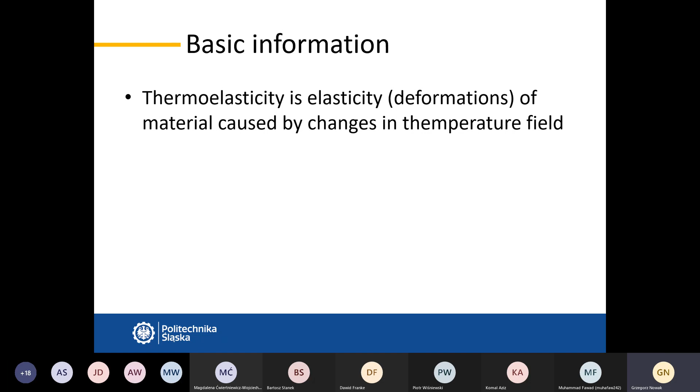In general, thermal stresses which are caused by temperature change arise in a system, in a component or object, when it undergoes a change in temperature. This is one thing which is required, which is crucial. And the other is that the component, system, or element is mechanically constrained.

So it cannot freely expand. Due to temperature change, it would like to extend, change dimensions, for example, but it is not possible, or it's only partially possible, or completely impossible because of constraints which are imposed on the body.

We'll discuss in a moment what the constraints can be and what is the reason for different stresses. So the topic will be covered during this lecture. I'm going to give you the information on the most common and basic cases, because if we go deep into the material, it starts to be quite complex.

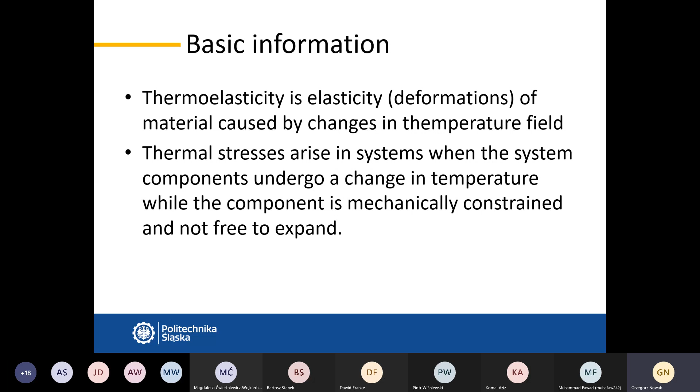Okay, so here we have two situations. One, a body, let's say a bar, can freely expand. So when we observe temperature change, it may be a temperature rise or temperature drop.

Doesn't matter, the object starts to expand. And if there are no constraints, no restraints against the deformation, and the body can freely expand, so there is nothing that constrains the deformation, the body will extend or will deform, and that's it. So nothing else will happen. Apart from the deformation observed, which can be measured, no stress will occur.

But on the other hand, when we have our object, the same object, supported somehow, let's say it is constrained due to walls. So we have a straight bar of a given length, and it is placed between walls, rigid walls.

Rigid means that they do not deform at all. Whatever the force is, they do not deform.

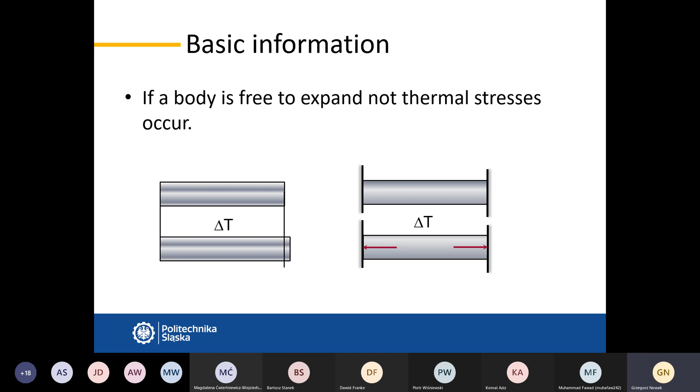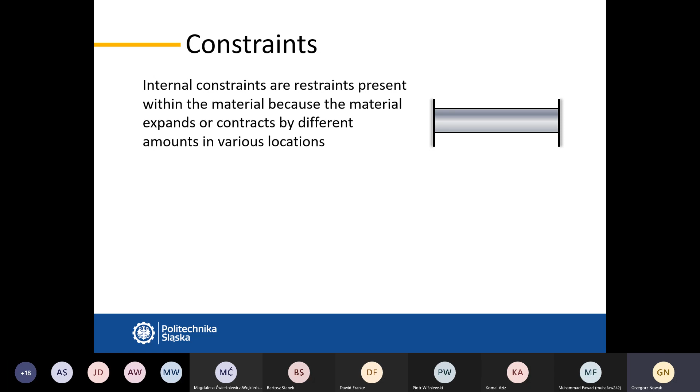And here we have the constraints, the two possible types of constraints which can occur in such a situation: internal constraints and external constraints. Internal constraints are restraints present within the material, inside the material, because the material expands or contracts by different amounts in various locations.

So you may imagine that with the temperature change, the material expands, or when cooled, the description is reversed. So let's say we have this situation.

We have a pipe with hot gas inside, and outside there is cold water. So look at what happens here: the pipe is hot here and cold here, so it tries to extend at the inner surface, but the cold water does not allow for extension of the external surface. So there is a conflict within the material between the areas which are hotter and areas that are colder.

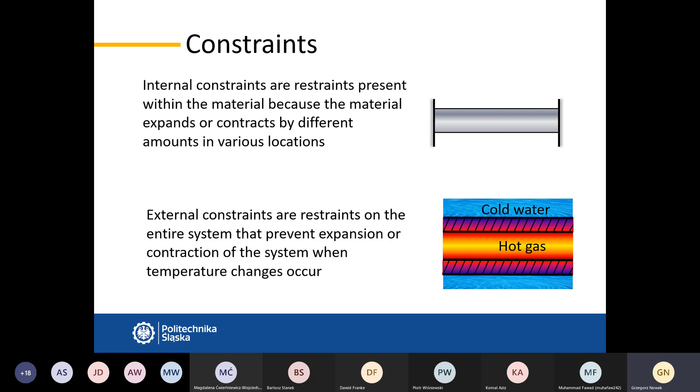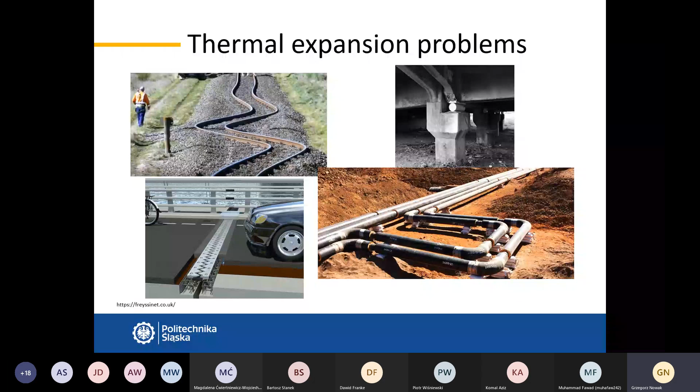Okay, we usually use different models to describe what happens in particular objects. As you may remember from your mechanics course or strength of materials courses, we usually use some models of objects which are bar or beam, so one-dimensional object, which are, let's say, pressure vessels, so shells usually, some discs. So most common objects encountered in practical applications, and they may be, of course, three-dimensional objects, which are quite difficult

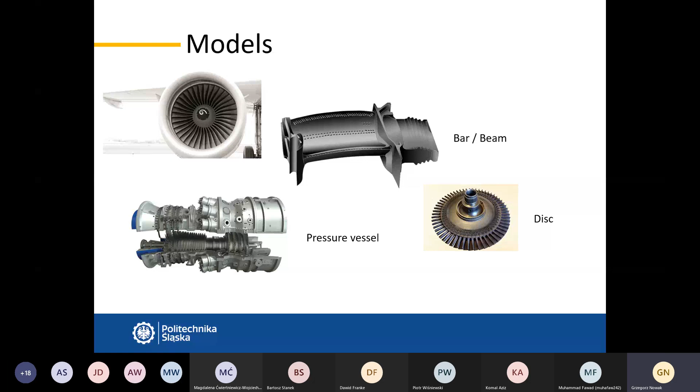to be analyzed by means of a sheet of paper and a pencil. So in such cases, you really do not have ready formulas for stress development, rather than use specialized software to determine stresses in such cases.

The determination of thermal stresses usually follows the thermal determination, or the determination of thermal field. So firstly, you need to determine the temperature distribution within the object, whether it's a steady state or a transient state. And on this basis, on the basis of temperature distribution, temperature field within the object, you can calculate thermal stresses. So these two phenomena are usually connected to each other.

So for many calculations, the first thing you need to do is to determine thermal field, and on this basis, with application of the appropriate material properties and application of constraints, you obtain deformations and stresses. So I'm just giving you a brief revision. I'm not going to cover the topic of heat transfer, but just brief information on what we need to provide for a usual computer system or the system you can write yourself, what we need to provide to get the temperature distribution, and then what to do to get the thermal stresses.

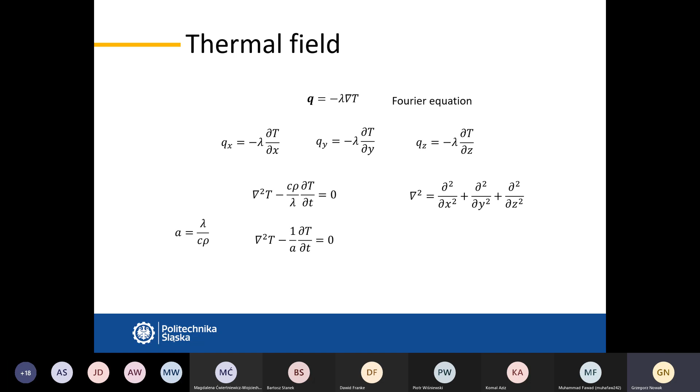We'll usually cover here the topic of steady states, or let's say a snapshot of unsteady states. So when the unsteady state happens, we can have a temperature distribution across a body. But we will not discuss the problem here. We will not solve problems of unsteady, so transient cases, because it's quite difficult to be solved on a sheet of paper apart from simple cases. These are the stories that are solved usually with a computer program, the software.

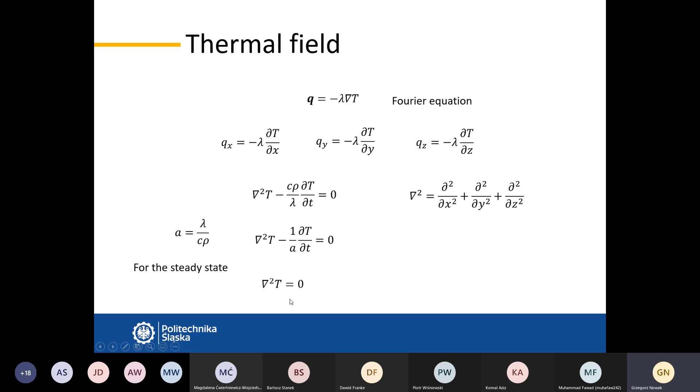If we have the steady state, the Laplacian of temperature is 0, so the second derivative over the space coordinates is 0. To solve the equation, this is of course the differential equation. We need some conditions so that we know something about the field.

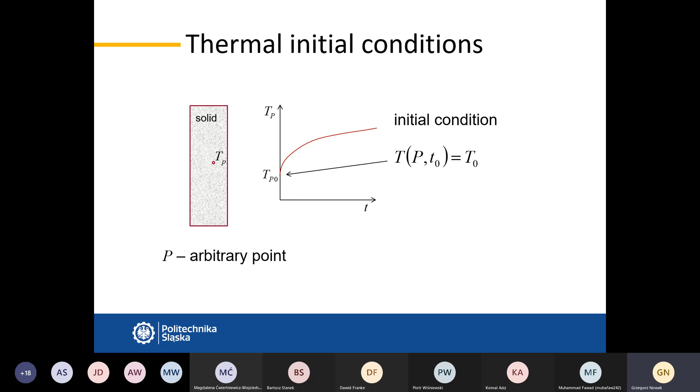If the problem is transient, so we have to foresee how an object will be heated up or cooled down, so how the temperature changes in time. We have to know what happens at some instant of time, let's say at the initial time of our computation. So we have to provide initial condition. So let's say a temperature distribution, for example, at t equals to 0. So at the beginning of our computations, or any other case, but usually the initial condition is the case where we know something about the thermal field, and then it evolves somehow on the basis of further conditions which are applied there. We can observe how the temperature field changes with time.

And we additionally need to provide thermal boundary conditions for the solution of the equation. So there are, as most of you know, 4 kinds of boundary conditions, 4 possible boundary conditions to be specified. All of them work well with the equation, of course. Not all of them are easy to be obtained for real situations, or sometimes not all of them are equally good applicable in the numerical software. Some are, let's say, more problematic than the others. But this is the problem of temperature field solution.

So the first boundary condition can be that we know how temperature changes at some specific points, line, surface, whatever. It can change in time, or it can be constant in time. So if we have transient conditions, it will change in time. If we have steady conditions, it will be constant during the entire time of our calculations. But one possibility is to provide temperature at some specific locations.

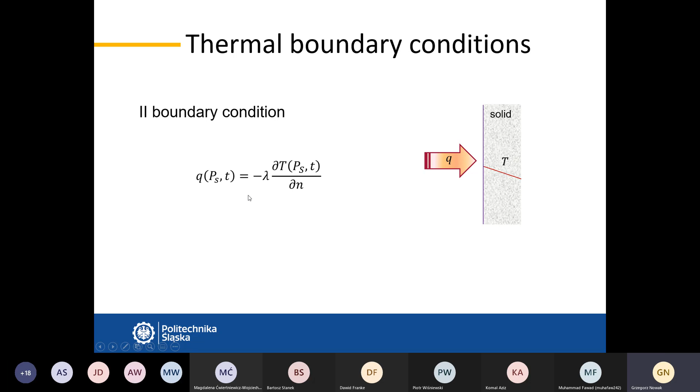And the fourth one is the contact condition, when we have bodies that are in contact. So we can equalize the heat flux that leaves one body, enters the second body. So we have temperature connection here on this. We can have a temperature connection there. They can be the same depending on the condition here on the boundary, but generally what leaves one body enters the second body. So these are the four boundary conditions, and there are four possibilities which are usually used to solve the heat conduction equation and to determine the temperature field.

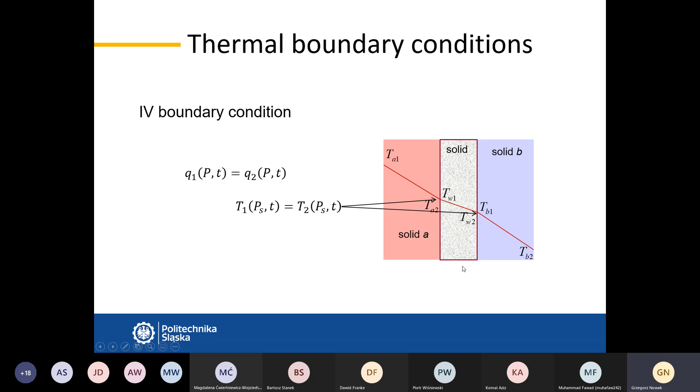And then we switch to a mechanical part. So we already have somehow determined the thermal field, and we try to get into the mechanical field now. So we'll discuss some issues on the mechanical problem. First, we'll start with the main properties that affect the material behavior under the changing temperature field.

So let's start with thermal expansion. This can be a revision since this topic should have been covered somewhere before in your education, in physics courses or strength of material courses. But to recall the information, we'll discuss it a little bit.

For example, if we have a bar, a rod, whatever it is, a body, at temperature T1, and it has length L, if we heat it up or cool it down, so generally we change the temperature, the body will expand.

We can discuss generally two thermal expansion coefficients, two possibilities or ways of discussing thermal expansion. One will be changes in linear direction, so linear changes in dimensions of the object, or the volumetric expansion.

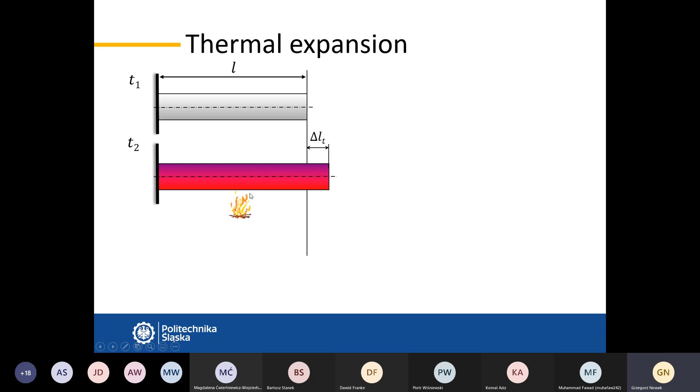Usually it is measured while thermal stress is 0. This is the usual case of determination or measurement of the linear thermal expansion coefficient. So you see dL over dt - increase in length due to increase in temperature, divided by the initial length of the object.

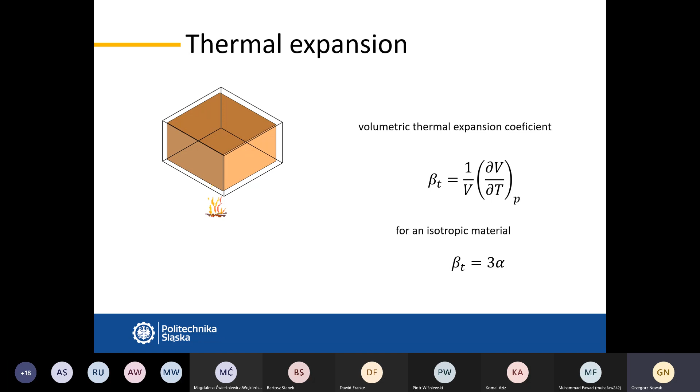If we discuss, let's say, a one-dimensional object, we treat only changes in stresses in one direction.

Let's look at some other quantities. If we have, let's say, a bar which has a length x0 and a width y0 in the lateral direction, and we apply force—so this is just a mechanical action—it changes its size due to the action of force, due to the deformations that occur in the material.

Of course, this is not observed when you discuss pure mechanics. If you recall your mechanics course, there was no deformation at all—we dealt there with a rigid body, a body that does not deform, which is, let's say, artificial. In a course of mechanics of materials, strength of materials, we assume that the material deforms, which is the case in real life, and the deformations, although quite small, are present.

So if we apply force to the bar, it changes its dimensions, and we can determine here strain, denoted with epsilon in the x direction, for example. So this elongation in this case is du over dx. Du means change in length, unitary change in length. So looking at the entire body, it is the change in length, this elongation, divided by the original length.

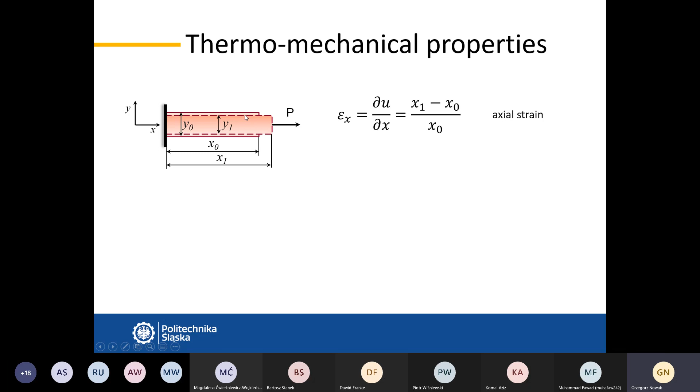And this is axial strain, meaning along the axis of the body. We see that it elongated, but we also see it contracted a little bit. So we observe lateral strain in the y direction, but also perpendicular to the screen in the z direction, and they are calculated in the same way: it's dv over dy.

u, v, and w are displacements—how far the material displaced, how far it moved. We observe that formally at the beginning, the height of the bar, let's say, was y0, and now after application of force it changed to y1—it diminished in this case. Similarly for the z direction, which is quite obvious. On this basis, we can determine a Poisson's ratio.

Poisson's ratio is the ratio of lateral and axial strain—along, let's say, perpendicular to the action of force, divided by the strain along the force. There is a minus sign because if epsilon x is positive, the body elongates, and the lateral strain is negative—it contracts. Opposite, if we compress the object, it would be shorter, so epsilon would be negative, and y and z would be positive because it would be thicker. So they are always opposite in sign.

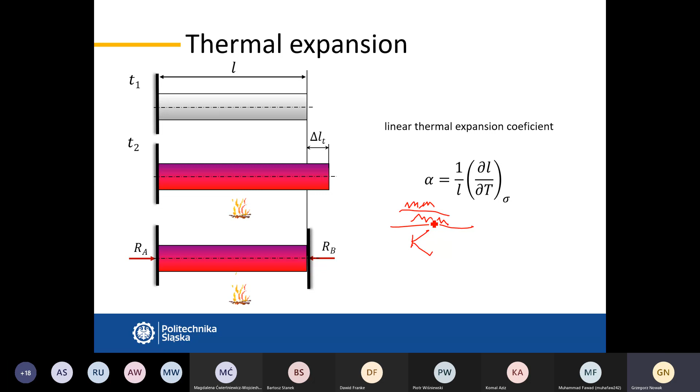This is strain, so change divided by the original quantity. So change in length divided by the original length. In general, the final result, if you cancel out the millimeters or meters, whatever it is, is 1 over Kelvin. But you have to have in mind that this is the strain resulted from a unit change in temperature.

Yield stress as well — there are some materials that do not exhibit yielding because these materials are brittle. So we have ductile materials that exhibit plastic deformation, and we have brittle materials that do not exhibit any plasticity, only elastic deformation and breakage, rupture. And we have a mixture, elastoplastic materials, which are not brittle, they are elastic to some region, and then they exhibit plastic deformation. So in this case, cast iron is the material that exhibits no yielding, no plastic deformation.

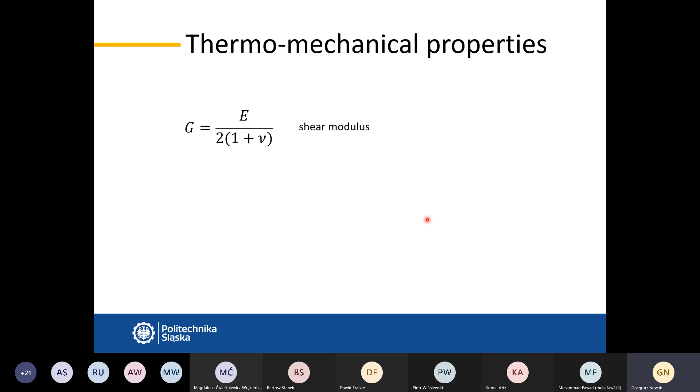We can also encounter another problem with thermal stresses, or with some thermal problems dealing with rapid changes in temperature. It can be determined on the basis of the so-called thermal shock parameter. And thermal shock, what is it? It occurs when a material is subjected to rapidly changing temperatures in the environment around it.

Let's say the situation can occur if a space vehicle re-enters into the atmosphere. We have a startup of a cold automobile engine, or a cold startup of a boiler or turbine. We have a quenching of metal parts. So there's many situations where the material undergoes very rapid changes of temperature.

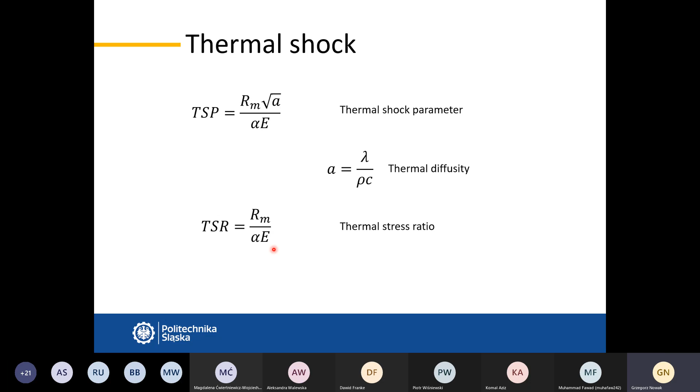This is expected. The thermal shock resistance shows us the magnitude of temperature difference, K, which if developed in the material would cause damage. We can more or less determine this for assessment of the material. But generally, the higher the stress, the higher the coefficients, the more resistant the material is.

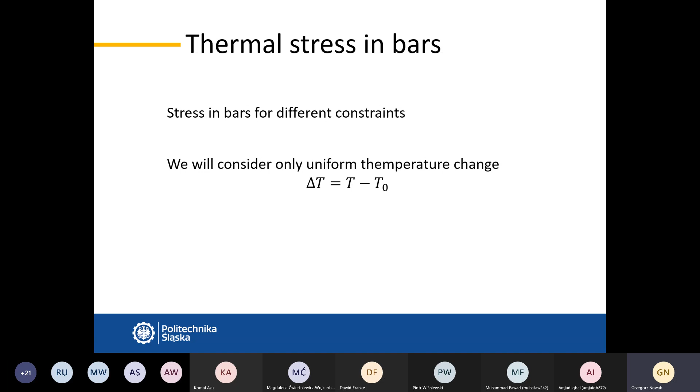We'll start with, let's say, the most stiff problem, the most rigid: a bar between two rigid walls, two rigid supports. We have already shown it - this is just showing that we increase the temperature, but generally everywhere we obtain the same temperature at the same instant of time.

Of course, it can be heated up or cooled down. We will not discuss the process of heating up or cooling down, just a given increase in temperature - let's say at the beginning it was 10 degrees and at the end it was 50. This is our interest; we do not discuss how the process ran, we just have the initial and final stage.

If we do a section - this is the usual way of solving such problems - we try to see what is the stress inside, what is the internal force, and in consequence what is the stress. We can build an equation of equilibrium for the cutoff part of the object. From here, from the entire object, we can say that RA equals RB, but we have no idea how much it is.

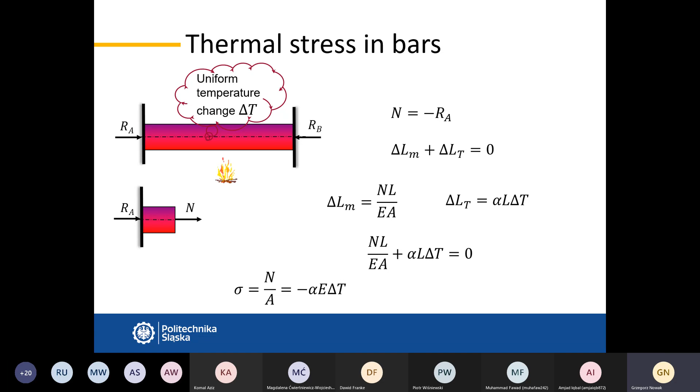So we have the first part, let's say the most rigid case, where there is completely no possibility of any deformation - a fully constrained object.

Now let's look at something different. Let's allow some deformation - not fully, so it is not completely free, but let's assume there is a gap. This is what we discussed before and showed on the bridge. So one of the methods to relax the external constraints is the gap.

So it's not fixed, but there is a small possibility to extend. Whether the object is heated or cooled, it has some possibility to change in length, which is governed by the equation we already know. If the increase in temperature is such that this elongation will be lower than the gap between the contacting object or support, so the elongation will not reach the boundary and will not touch the support, the stress will be zero. So the object can freely extend.

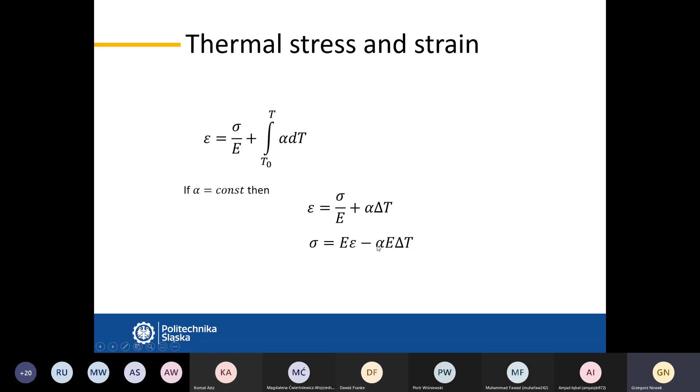So you see that the stress now will be slightly different. We have an opposite sign of sigma for the mechanical and thermal parts.

So you see that the stress will generally be smaller because we have 1 minus something. If this something is non-zero, so delta is non-zero, the stress will be lower than in the case of completely constrained deformation.

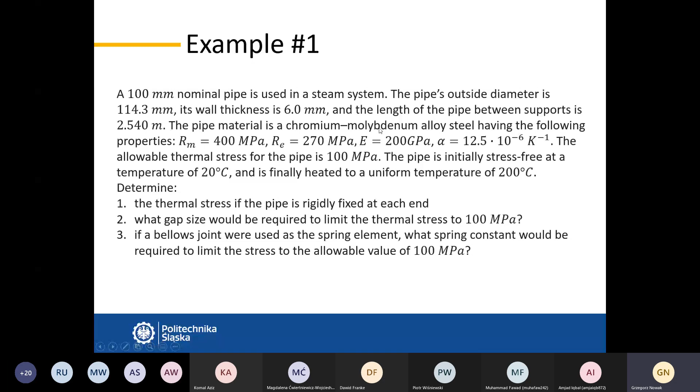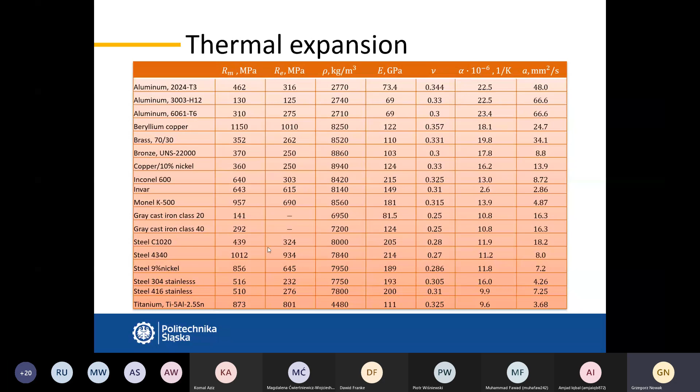Okay, we can see this is a chromium molybdenum alloy steel. If we go to our table, do we have something like this? It's somewhere here. Or this one, it's somewhere here. So the ultimate stress is something around this value. So we can expect that the material for sure is within the plastic range, above yield stress, or even reaching the ultimate stress level.

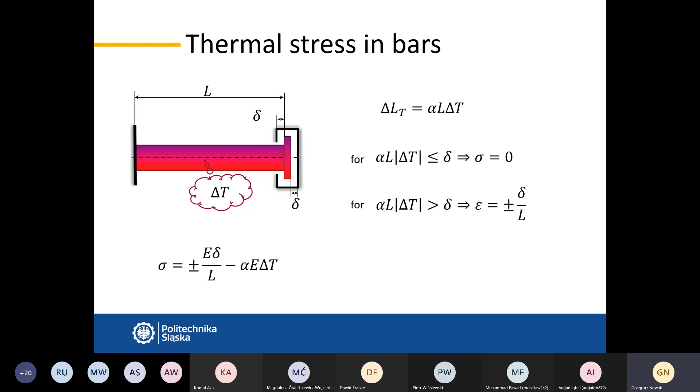So this is a destructive temperature rise for this material, and this is, as we see, only 180 degrees Celsius temperature rise. Okay, but the ends are fixed, so no movements are possible.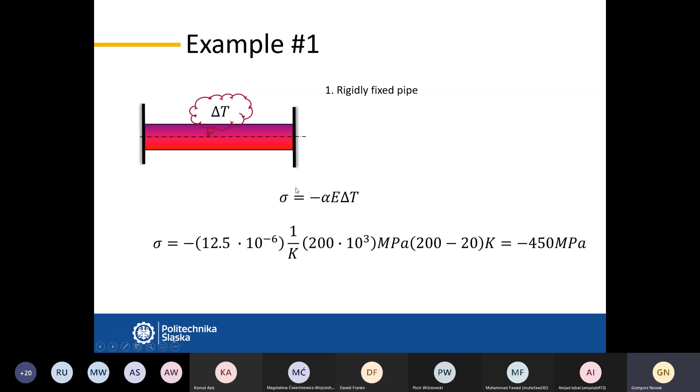So let's look at what we can do with the problem to reduce the stresses a little bit. Assume we have a support with a gap. So there is a gap delta before it gets into contact with the support.

So we know that the stress is governed by such a formula, which we already developed, and the gap is here. Other parameters we know: the maximum allowable stress, alpha, E, delta T, and L. So everything is given.

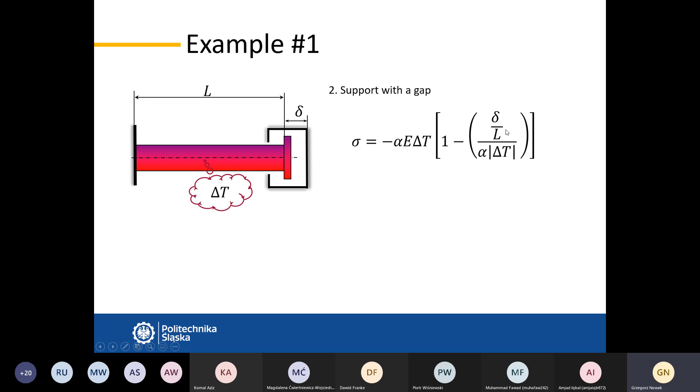So this data is introduced, and we can calculate delta from such a formula. If we solve it for delta, we can calculate the gap here, which is 4.45 millimeters. This means that if the gap between our bar and the wall is 4.45 mm, the stress developed will not exceed 100 megapascal.

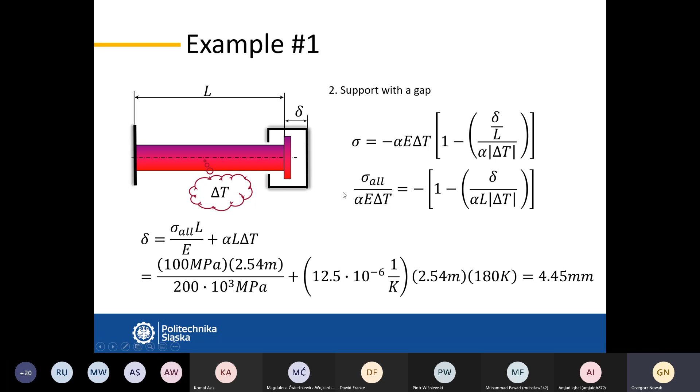Because we limited this to 100 megapascal, the allowable value given here, we can also check the pipe against buckling, because if it leans against the wall, it is compressed. As you may remember from the strength of materials course, a slender object, so a long and thin object exposed to compressive loads, is threatened with a buckling process, a sudden loss of stability.

So it can buckle, it can rapidly bend if a compressive force is bigger than the so-called critical force. Recall the basics of strength of materials. For this reason, we will need the cross-sectional area of the pipe, which is pi times D minus G, where G is the thickness of the wall, times G, and it will be 2041 square millimeters. So this is the cross-sectional area of the pipe in question.

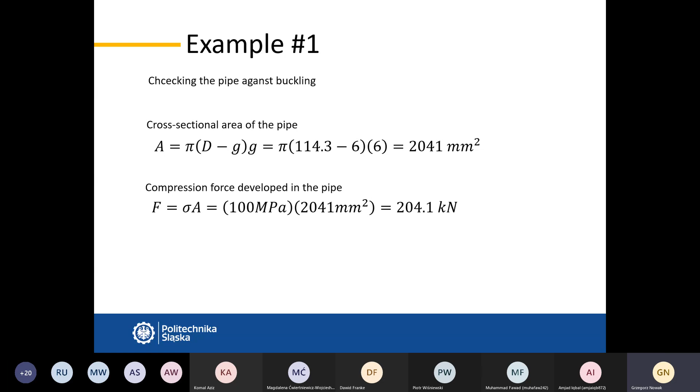Okay, to check the pipe against buckling, we need some more things. This is the moment of inertia, which for a pipe is pi over 64 times the external diameter to the fourth power, minus d minus 2g to the fourth power. So external pipe minus internal pipe. This is the moment of inertia, and the Euler critical force is two pi squared times E times I, divided by the buckling length squared.

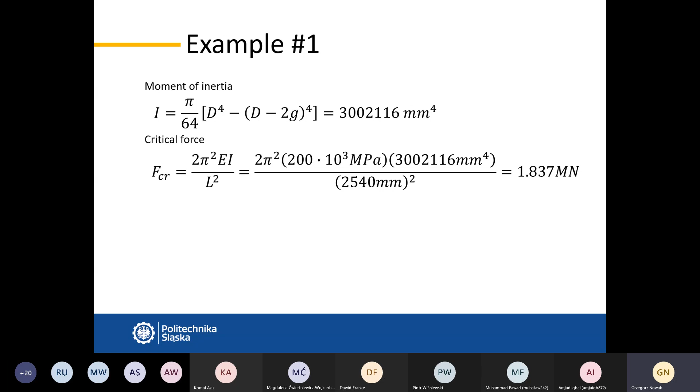And it is, as we put there, 1.837 meganewtons. So this is the force that would cause buckling, the critical force. Our force is 0.2 meganewtons, which was 204 kilonewtons, so 0.2 meganewtons. We see that the force is like 9 times lower than the critical value, so there is no threat of buckling. So we can sleep calmly, no problem with buckling in this case.

So this is the thing. This was the possibility to reduce stresses if the gap is introduced, 4.45 millimeters. So that was one solution to the problem of excessive stress.

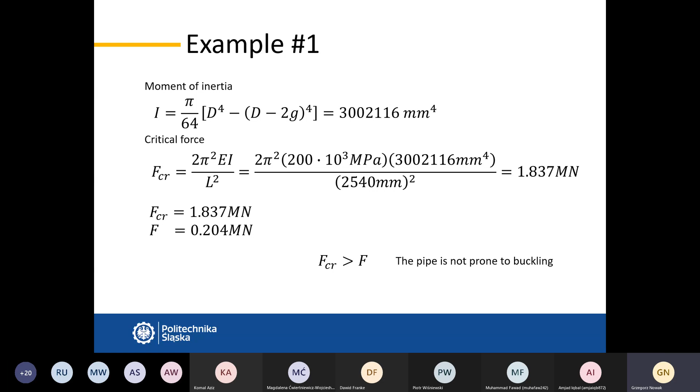We can check what size would be required to have no stresses in the bar, which means how far the object extends. This is the amount, of course: delta equals alpha L delta T. It would be 5.72 millimeters. So if the gap was that much, the pipe would not come in contact with the support, so there would be no stress at all.

To have stresses not bigger than 100 megapascal, it's enough as the gap is 4.45 millimeters. So you can control the amount of stresses developed in the system by applying an appropriate gap between the object that is extended, under the change temperature condition, and the support.

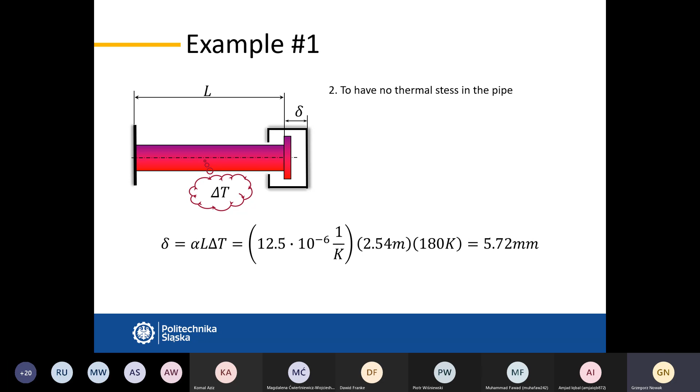There was a second possibility to be discussed. There was such a question: what elastic support should be applied there? So what should be the spring constant, in other words elasticity of the support, to have also stresses not bigger than 100 megapascal. This is the case we have to discuss now.

So we use the formula also developed there: minus alpha E delta T, and the factor which is responsible for relaxing the stresses, this part, EA K spring L. All of these data are determined. We have to solve it for K spring, to determine how big the K spring should be to have the stresses not bigger than 100 megapascal.

If we divide it by alpha E delta T, on the left hand side we have sigma divided by alpha E delta T, and that is minus 0.222. On the right hand side we have 1 over 1 plus EA K spring L.

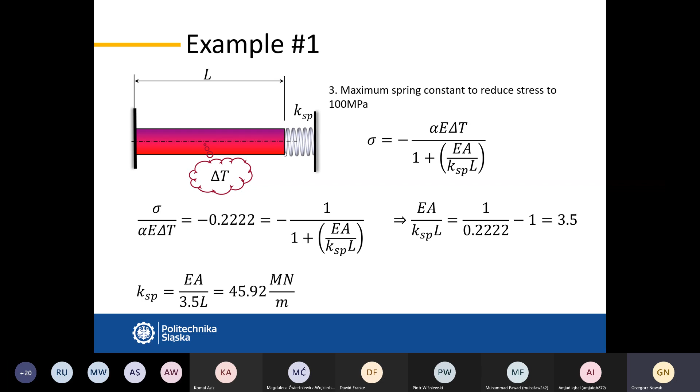So calculating K spring, or at first this factor which is in the bracket, it should be 3.5. So the K spring should be 45.9 mega newtons per meter, which means that 45.9 mega newton force would provide a meter change in length.

Of course, this is expressed in the basic SI units. If you divide it by 1000, here would be kilonewton, here would be millimeter. So 45 kilonewtons of force would be required to compress the spring by 1 millimeter. This is the meaning of the K spring. So this is 45 meganewtons per meter, and this is a fairly stiff spring.

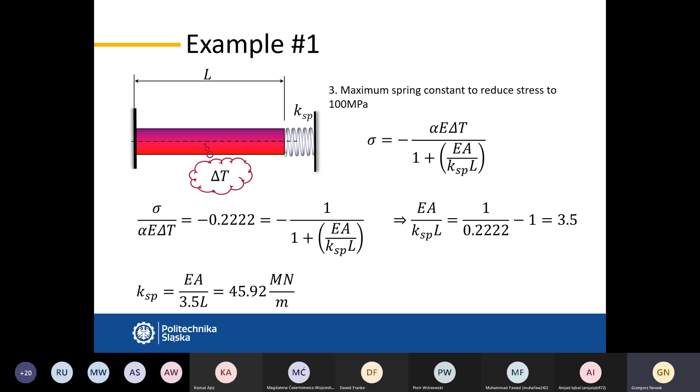Okay, now we'll go a little bit deeper. We will look at problems where we have components co-working together. Let's say we have bars in parallel. There are two objects, which is very often the case encountered. Different structures are built in such a way that we have elements that are connected together.

We will discuss here such a problem that we have bars in parallel. They are of different lengths, just schematically shown one next to another. The configuration can be different, but in general they work together. The first one is of length L1, the other is of length L2. The left ends are fixed, and the right ends are joined together with such a rigid plate.

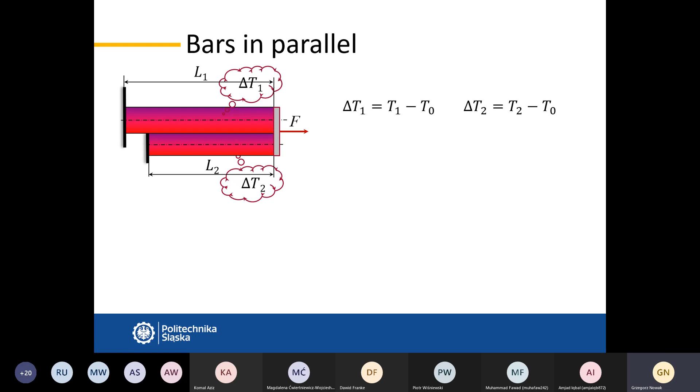So depending on the magnitude of delta T, in general it will always be the same story: one will have positive stresses, the other will have negative stresses. One will be extended by the other, and the other will be compressed by its neighbor. And this is the result.

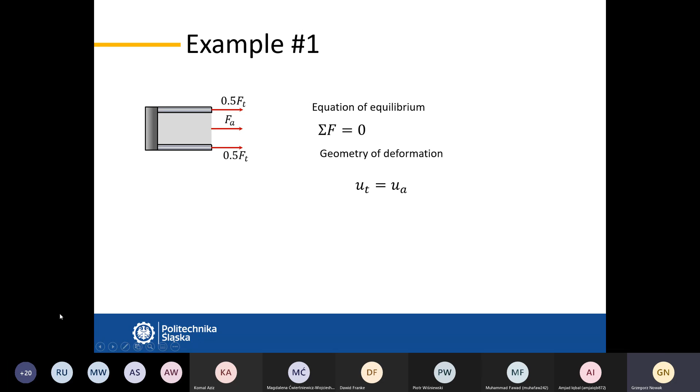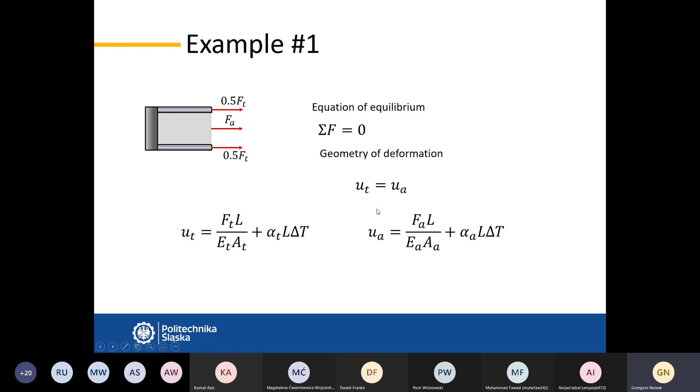We know that elongation is provided by force, and also by temperature change—this is what we've been discussing all along. So force in titanium provides elongation: force times length divided by E times A for titanium, which is the mechanical elongation, plus the thermal elongation, alpha L delta T. Same for aluminum, the core: force developed inside times L over E times A, plus thermal deformation. Both elongations are the same, so we can compare them together.

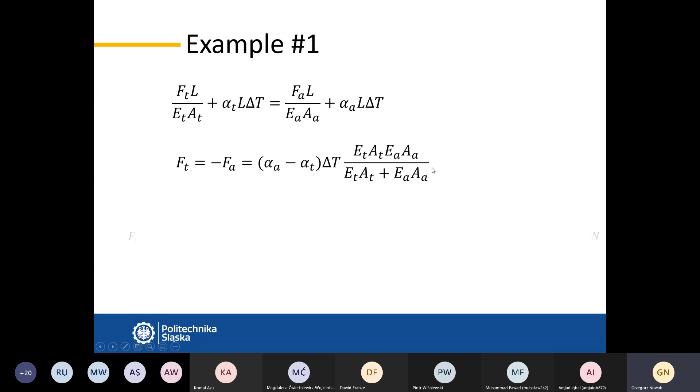So they are put into an equation, and we can determine the force. From the equilibrium equation, Ft equals minus Fa, so we can substitute one for the other, and calculate the force using the difference of coefficients of thermal expansion, the common increase in temperature, and the cross-sectional areas and Young's moduli as factors. All the data are known—expansion coefficients, how much it was heated up, and all material and cross-sectional parameters—so if we put the data in, we'll get the result.

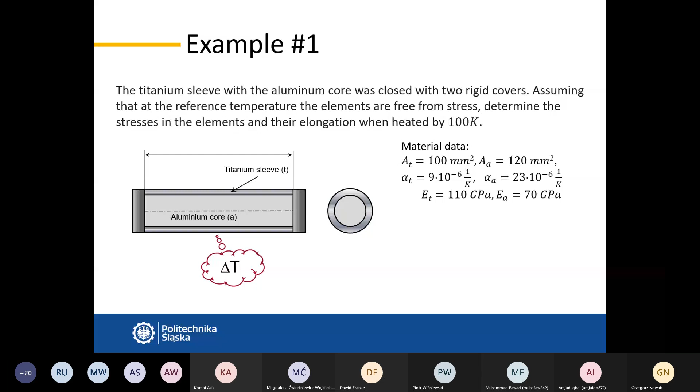The force developed inside both the aluminum core and the titanium sleeve is the same, equal to 6.66 kilonewtons. As you may expect, the sleeve will be extended and the aluminum will be compressed. If the core extends more, it will be constrained by the titanium sleeve. So the titanium sleeve will provide a compressive force on the aluminum, while the aluminum will provide a tensile force on the titanium, and vice versa—one is compressed, the other extended.

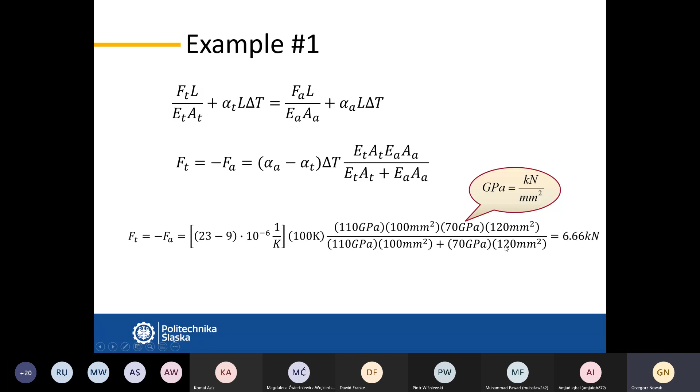We know the magnitude of the force is 6.66 kilonewtons. We were asked to determine the stresses. Stress in titanium is the force divided by the cross-sectional area of the sleeve, which is 66 megapascals. In aluminum, it is minus 55 megapascals. So the stresses in both components will always be opposite—if one is in tension, the other will be in compression, because they interact with each other.

They deform at different rates, but the total elongation is the same—UT or UA, both deform the same. If we put the data into the formula, we get 1.44 millimeters observed as the deformation of the entire system while heated up by 100 Kelvin. But when more than one material is involved, it results in mutual interaction between them—we can say this is an internal constraint, because everything happens inside the co-working, co-making components.

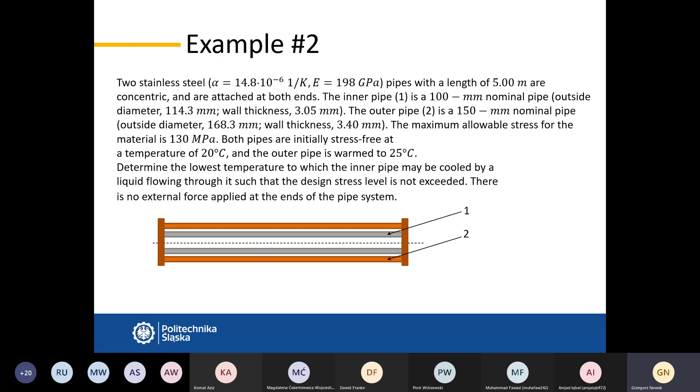So we have exactly the situation which was discussed before. We have two pipes in parallel, so we can use the formulas which were developed there. So we need to look at the formulas. We have stresses here, so we need delta T's, one of them will be calculated. We know stresses which can be developed. There is no force, so this factor is 0. And we have such products EAL.

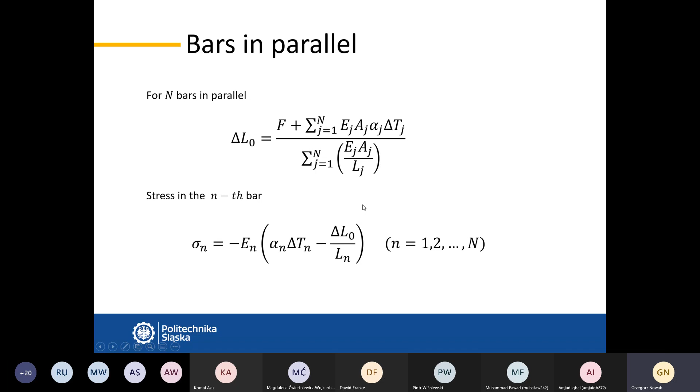So we need the cross-sectional area. Cross-sectional area of the first pipe is 1066 millimeters squared, and the second pipe is 1761 millimeters squared. And this ratio E1 A1 L2 divided by E2 A2 L1, it is in the factor. Since the pipes are made of the same material and the same length, E1 and E2 is the same, L2 and L1 is the same, so it cancels out, and there remains only the ratio of the cross-sectional areas, which is 0.6052.

What else do we need? We have temperature differences. Delta T1 is T1 minus T0, and we know that. Delta T2 is T2 minus T0. T0 is known in both cases. T1 is known. No, T2 is known - what happens with the external pipe, it's heated by 5 degrees. But if we expand it, we'll get T1 minus T2 from this difference of temperature changes for both pipes. So it is T1 minus T2, so the final temperature of pipe number 1 and final temperature of pipe number 2.

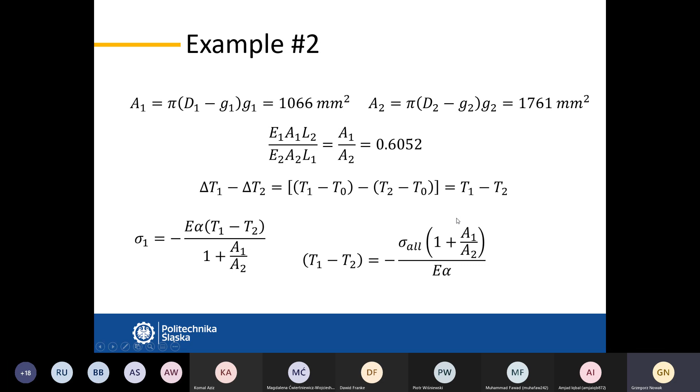So the temperature difference between these two pipes, if we put the data in, can be 71.2. So the lowest temperature of pipe number 1, the pipe that is inside, is 25 minus 71.2, so it's minus 46.2 Celsius.

And in such a case, sigma 2 will be 78.7. So what we gained is that if the temperature of the external pipe has risen by 5 degrees Celsius, so it's 25 now, the internal pipe temperature may be as low as minus 46.2 degrees Celsius. In such conditions, in pipe number 1, the internal pipe, stress will be 130 megapascal. But on the other hand, in the external pipe, stress will be positive and it will be 78.7 - a little bit more than half of the stress obtained in the internal pipe.

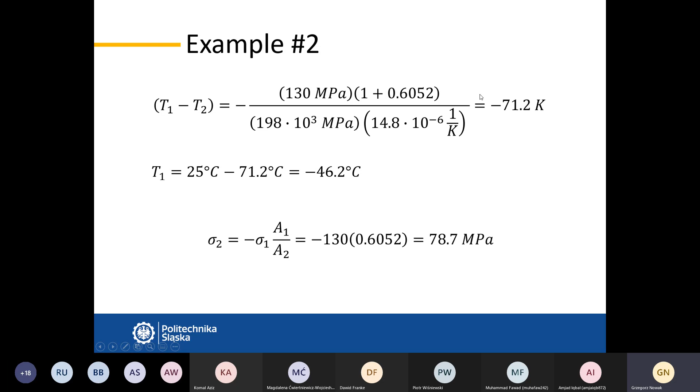Okay, and some remaining parts. I think we will be able to finish this topic today. I don't know, we'll see.

So the same situation can occur, similar to what it was for a single member. We can have the same situation in case of two members connected together, but not rigidly, not with a rigid plate, but providing them slight independence. So we can again apply there an expansion gap.

So they are not fixed together, but there is a slight possibility of slight difference in elongation. So before they get into contact, there is, let's say, some buffer available.

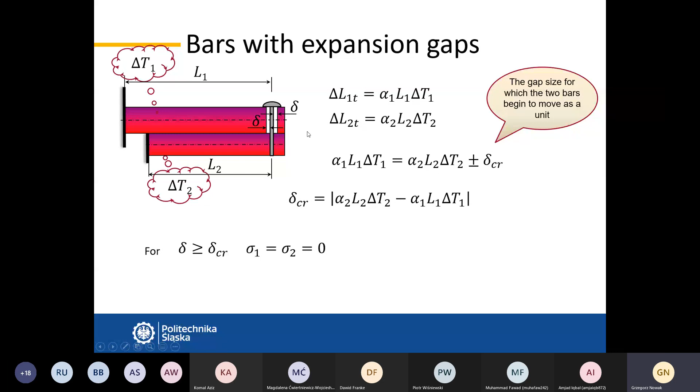And let's now consider the case in which there is no external load applied. So we have only mutual interaction between these two members. So net force, external net force is 0. There is nothing else acting from outside. So only if one member extends more, it drags the other member. So they interact between each other, with action-reaction. No external force applied, so the sum of these two forces generated must be 0.

So if no external force is applied and it's 0, we have that if the lower member extends more, it will drag the other member, so it will provide an opposite force in the other.

So the equation for equilibrium is F1 plus F2 equals 0. These are the factors from the previous slide, that's why we found these forces sigma 1 A1. This is the force in member number 1, and this is the force in member number 2. Sigma times A is just a force.

So if we put the data in, the sigma times A from the previous slide gets bigger and bigger. The formulas are starting to be terrifying, but in general there are only material properties, lengths, and rises in temperature. Here is the delta observed, which is the thermal gap between these members. So the total elongation of the entire system, when it gets into contact and they move together,

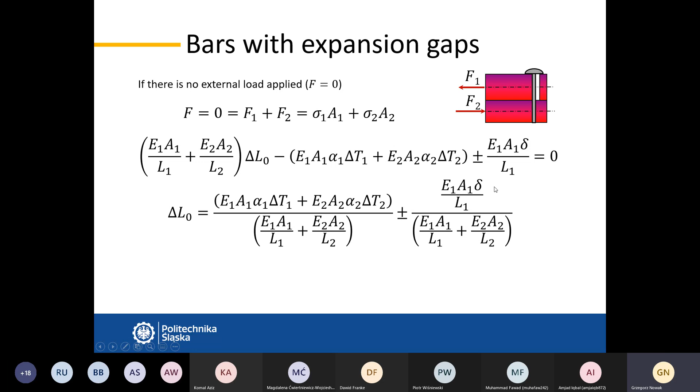can be expressed with such a, let's say, quite a big formula, but still an analytical one. We have E1, A1, alpha 1, delta T1, so everything for member number 1, same for member number 2, divided by the rigidity divided by length, plus or minus depending on the direction, E1, A1 over L1, the same factor, times delta, and divided by the sum of these same factors for both members. So consequently, stress in member number 1 can be calculated very similarly to the way we calculated for members without a thermal gap. The only difference is this delta over L1 term.

So we see that with this factor we can diminish stresses. If one of the stresses is diminished, the other is also diminished, because it is influenced here by delta L0. So the mutual movement of these two members becomes smaller.

Because there's only a couple of minutes left, I think we'll come back to this topic next time. We'll discuss the problem on the basis of an example showing the influence of the gap, and we have to finish.

We also have to introduce one more thing, which was discussed for a single member: the elastic connection between members. That will also be introduced, and we'll illustrate it with an example. We'll see how the connection influences the members, to what extent the kind of support or connection can affect stresses, to what extent they can be reduced when we apply a certain expansion gap or a certain elasticity in the connection.